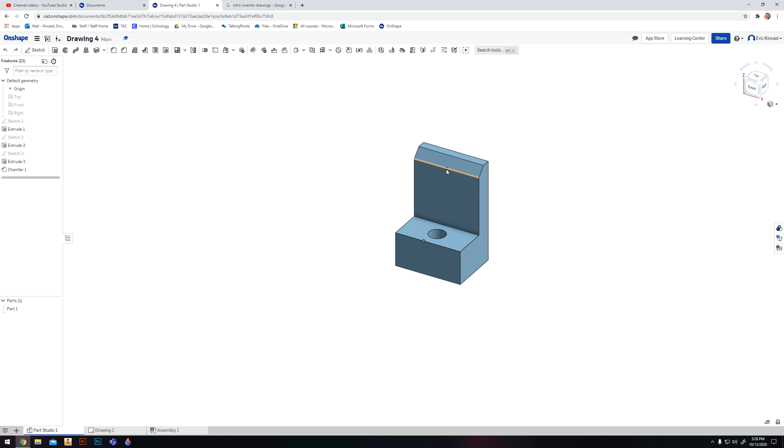All right, welcome to the fourth OnShape Drawing assignment. This one's going to be a little bit harder. We have a few features like a hole in a specific location. We've got some extra extrusions. We got a chamfer going across the top. Right, and you will be given a drawing that looks like this, and you'll have to reproduce that object.

Okay, so looking at number one, the first thing we want to do is determine how tall our object is and how wide it is. Right, so we could do that by looking at our front view. So our object is 3 inches by 2 inches. So let's start that first, right? So let's go to Documents, create a new document called Drawing 4, and hit OK.

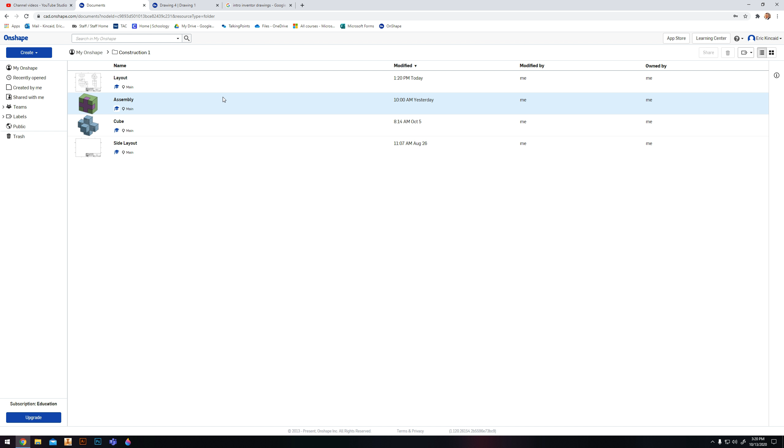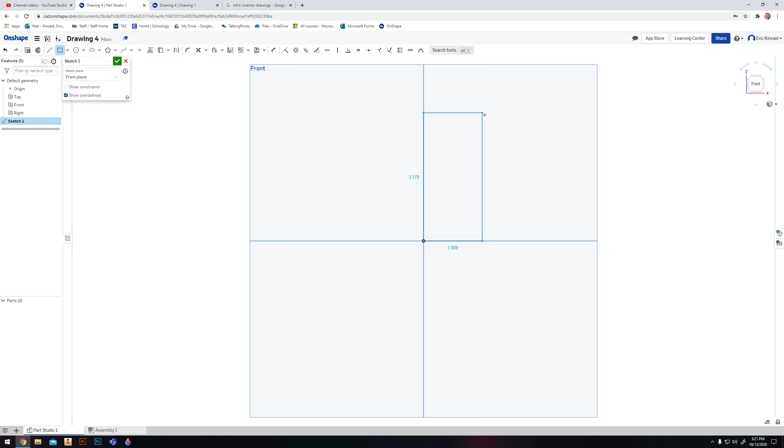From there, you're going to start a new sketch on the front plane, and we're simply going to draw a rectangle. Oh, I missed the origin point. Let's make sure we start on the origin. Draw a rectangle that is 2 inches wide by 3 inches tall.

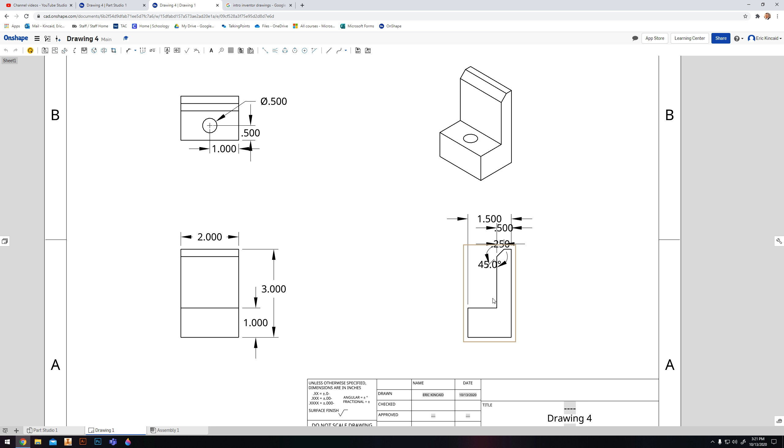All right, so we have our overall drawing size, but obviously we need to figure out a few things like how thick is it overall, and does it need to be extruded in overall width, right? So we're looking at our side for our depth profile, right? So overall it's 1.5, so we can either choose to extrude it the entire 1.5, or it looks like coming up from this line it is 0.5, half of an inch thick just on this part,

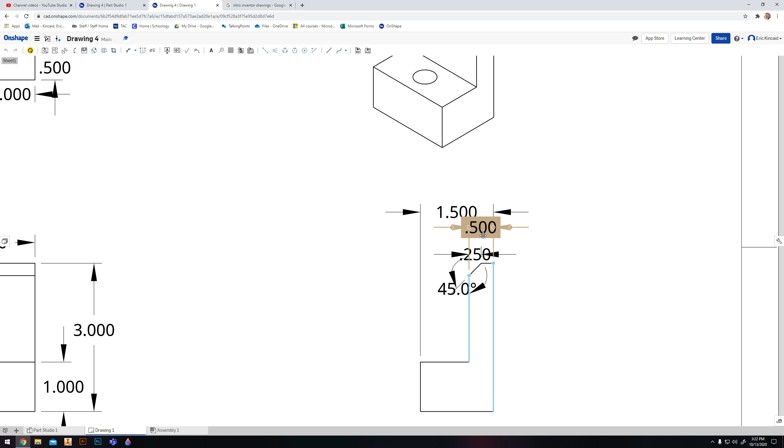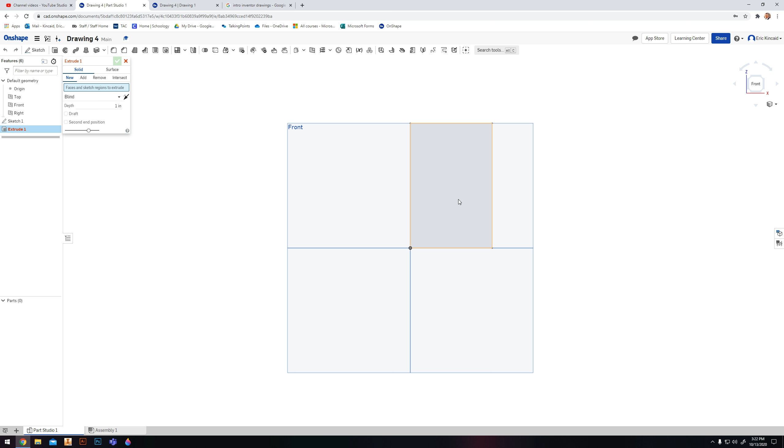right? So that means that this part down here, if we do a little math, if this is 0.5 and this is 1.5, we know that this is 1 inch, right? So I'm just going to extrude it 0.5, and then we'll just build a little rectangle off the front, and we'll extrude that 1 inch, right? So let's do that. I'm going to extrude this rectangle, change my depth to 0.5, and hit OK. Right, and then we got our back profile there.

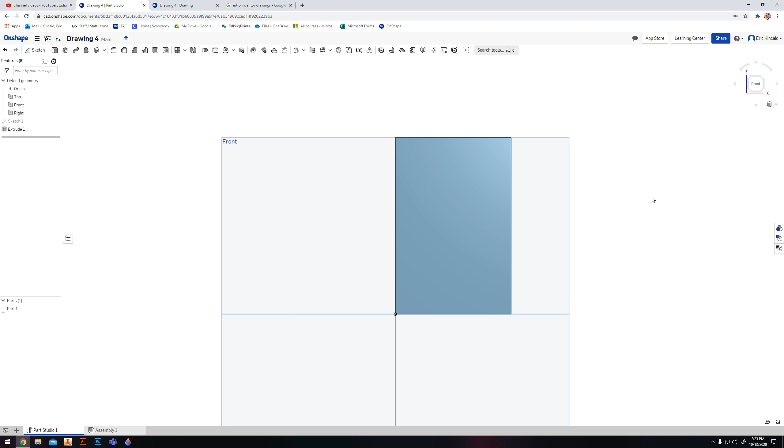So I said I wanted to build a small rectangle off of the front of it. How big does that rectangle have to be? So it looks like it is 1 inch, and it's all the way across, so we know that's 2 inches. So it's 1 inch tall by 2 inches. So I'm going to go back into OnShape here, go to Sketch, select my front face, rectangle tool, and I found that OnShape doesn't like if you tell it that it's 2 inches both times, right? So if I bring my rectangle out all the way to the other edge, it'll stop at 2.

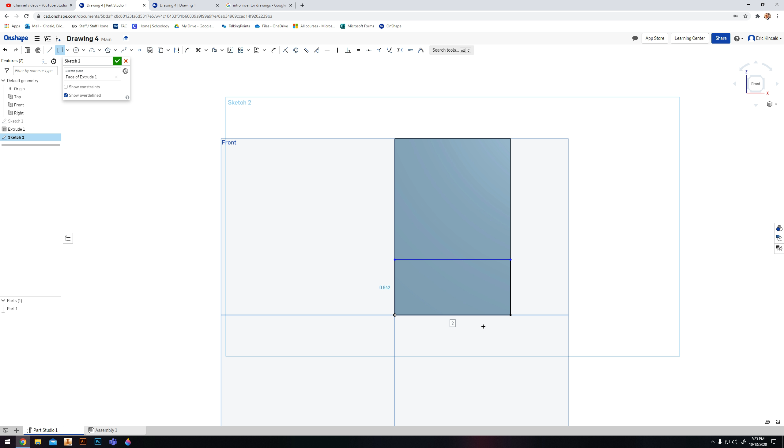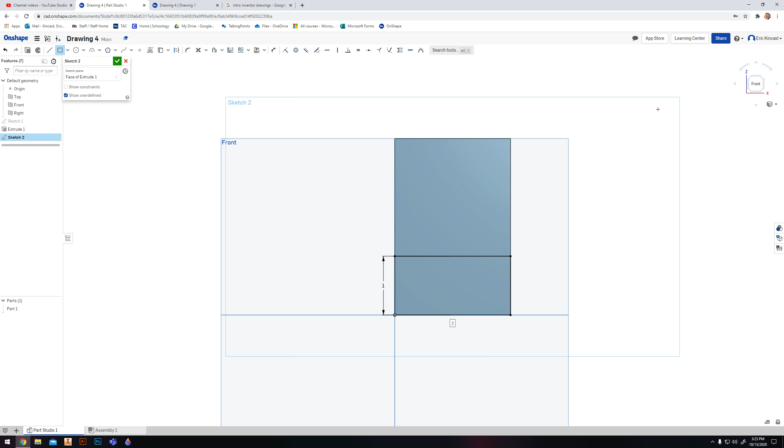And I'm going to bring this up. Now you can sit here all day and try to get it to 1, and I got it to 1 actually pretty easily. But ideally, what you want to do is click. If you hit enter on 2 here, it's going to error. But if you move your mouse over and don't click it, just highlight it and just type 1 and hit enter, it'll work. But if you change that number, it'll error that rectangle and turn red, because it's saying that from here to here is 2, and if you try to change that, it's trying to change this as well. Not a huge fan of that from Onshape, but it is what it is.

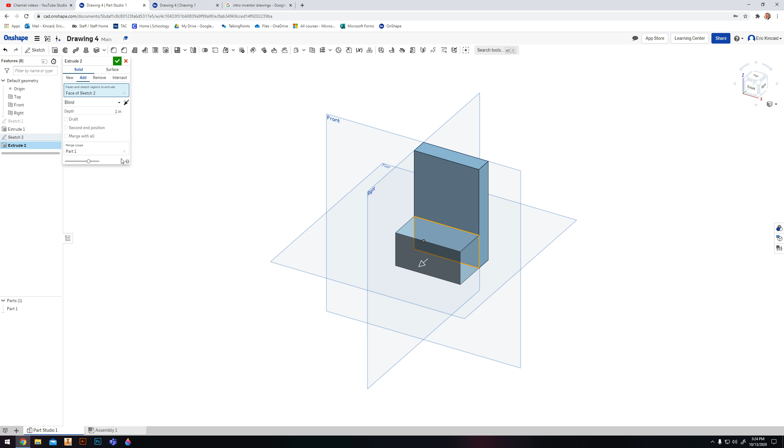So that's all I'm going to do on this sketch, because I need to extrude this out. And how far do I extrude it out? We did a little math there, right? 0.5, I need to bring it out to meet 1.5, so I'm going to bring it out 1 inch. Right, and it already did it for me because 1 inch is the default. So I'll hit OK.

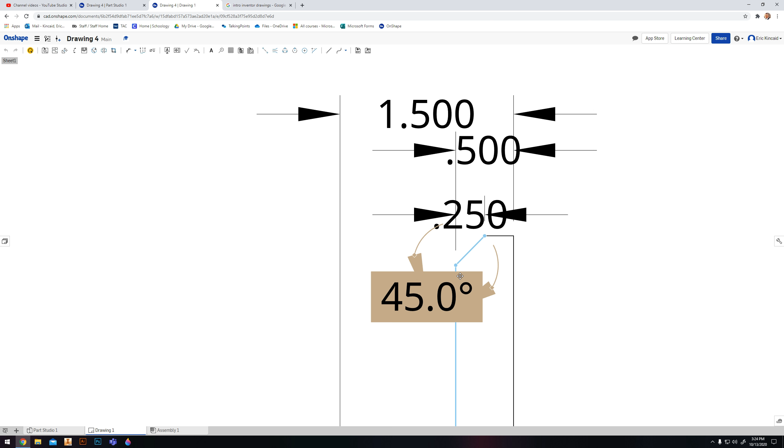So next we have a few options. We can start to figure out where our hole is, or we can add that chamfer up top, either or. Let's start with the chamfer. It's pretty easy. So some information about the chamfer. It's going up at an angle of 45 degrees, right? And the measurement is halfway across our overall depth. So it starts and then it's 0.25 inches long. So with those two, we can figure out how to create it very easily.

So I'm going to go back to my drawing. This one you don't even need to start a sketch. You can come up here to the chamfer tool. If you can't see the chamfer tool, you may need to zoom in or out. But I'm going to click the chamfer tool, and default is 0.2 inches.

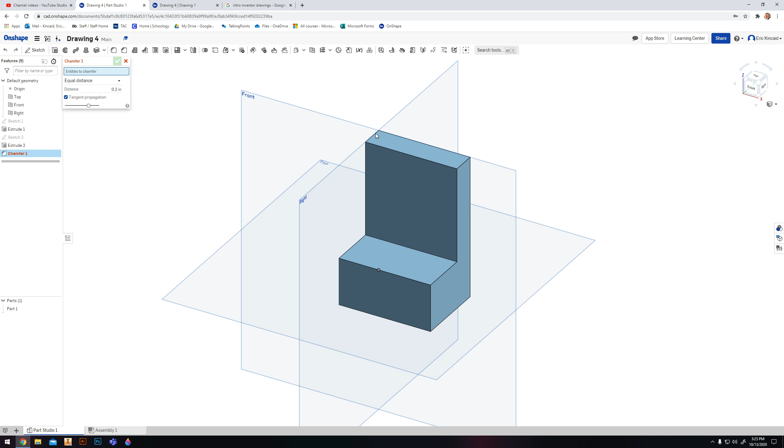But if I hover this edge that I want to chamfer, right, it'll glow that yellow-orange color. If I click it, it'll flatten it for me, right? And I need the distance to be 0.25 inches. And it automatically makes it 45 degrees for you.

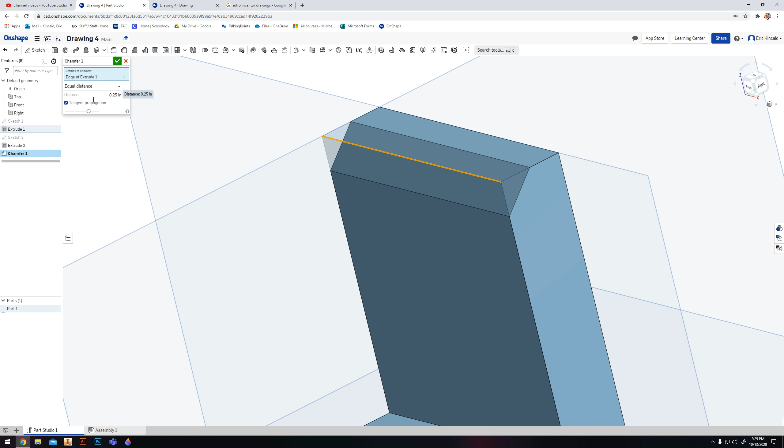Right, so I'm just going to chamfer this 0.25 and hit the check. Right, and that's actually it to add that chamfer. It's easier than it looks. And you could chamfer any edge you want. I mean, we don't need to, but technically you could do all of these. Right, you don't need to do that. Don't do that. But next thing we need to do is add that hole.

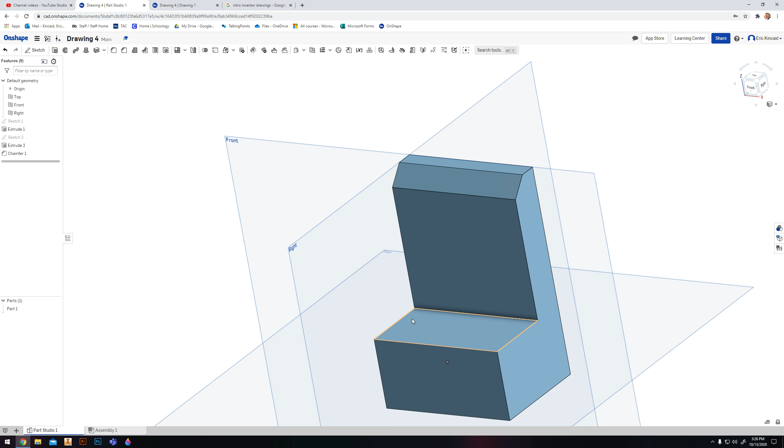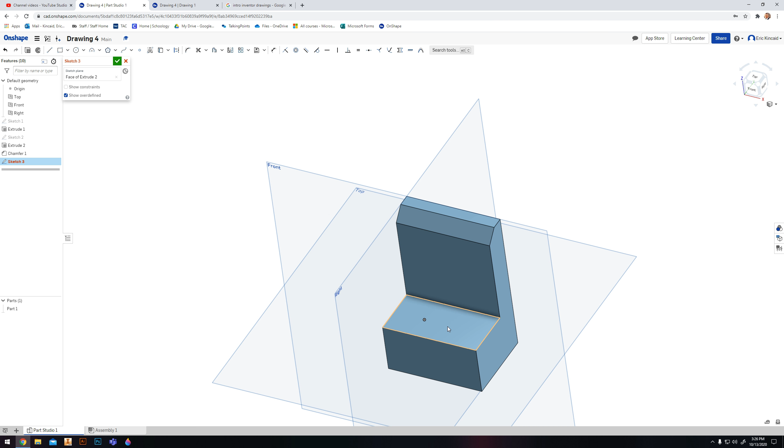So there's two different ways to make a hole. There is the hole feature, or there is just making a sketch and drawing your hole. Doesn't matter which one you use, but for this one I'm just going to draw a sketch because I'm pretty quick at it, right? So I'm going to select the face as the top of that little shelf area. Rotate so I'm looking at my top. And I'm going to select the center point circle tool, or C on your keyboard.

And I'm going to purposefully not put this in the center, but you want to try and get it near the center, so I'll just make it off center here. Right? And I'm going to draw a circle. But oh wait, we didn't look. How big is this circle? Let's go back.

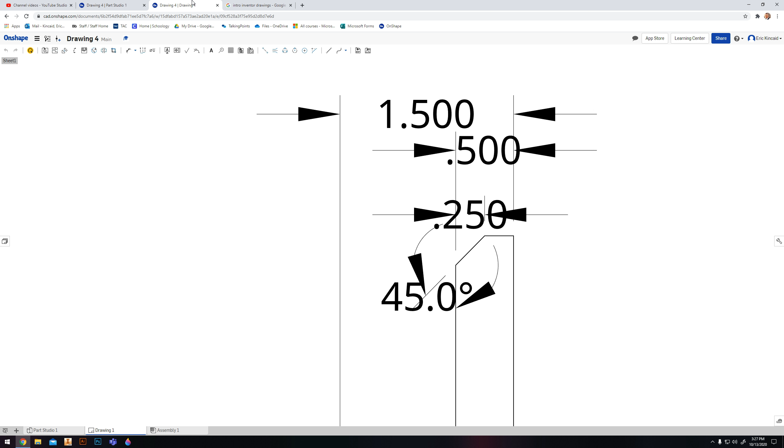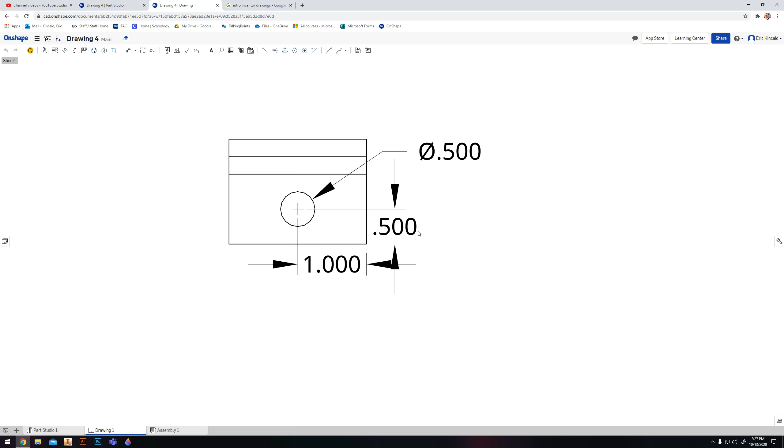So over here we have some important dimensions looking down from the top. We have this universal sign for diameter. Diameter of a circle is the measurement from one side to the other. So that means that the diameter of this circle is 0.5 inches. And then the other dimensions that we have here, 0.5 inches from the front and 1 inch from this side. Okay, so some important dimensions there.

All right, so again, I'm going to draw my circle. I'm going to drag it out, click, and I know that this circle needs to be 0.5 inches in diameter. And you'll see that it'll draw that sign again, right? That is diameter. So I look kind of centered. It's not too bad, but I need to make sure. So I'm going to hit D for dimension, or go to the dimension tool up here.

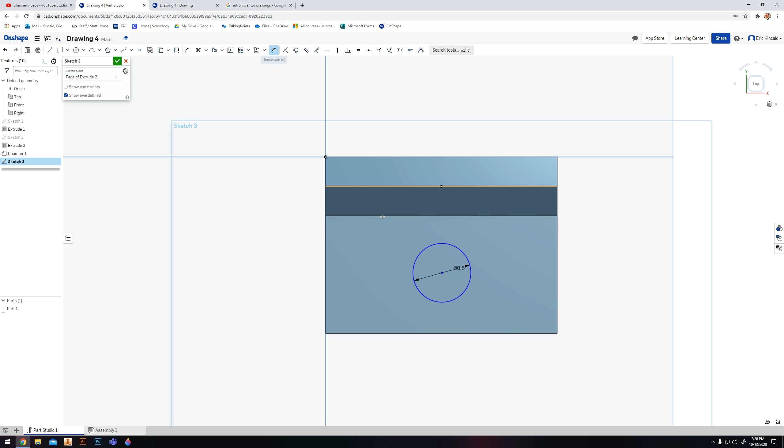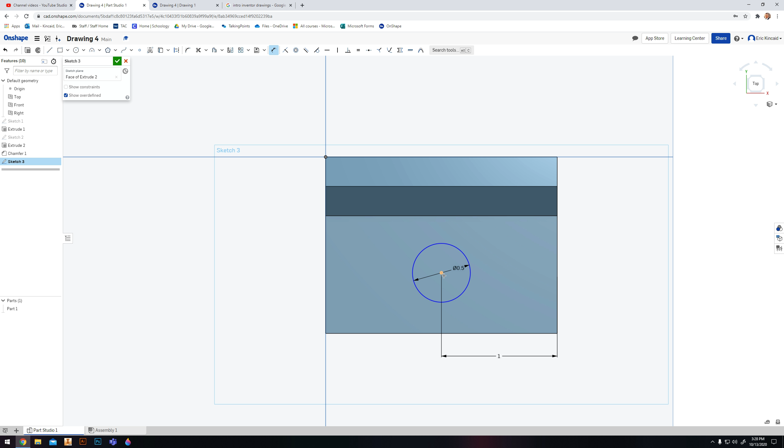And I'm going to click my center point. And over here, move it off my object. And I was very close, 0.996 in fact, whenever it should be 1, and that's the center of this object. Right? So now I need to move it 0.5 from the front of this. So I'm going to click the center point, click the bottom point, drag my dimension off of my object, drop it. I was very close there too, 0.51. It should be 0.5. Enter. And now that is centered on your drawing.

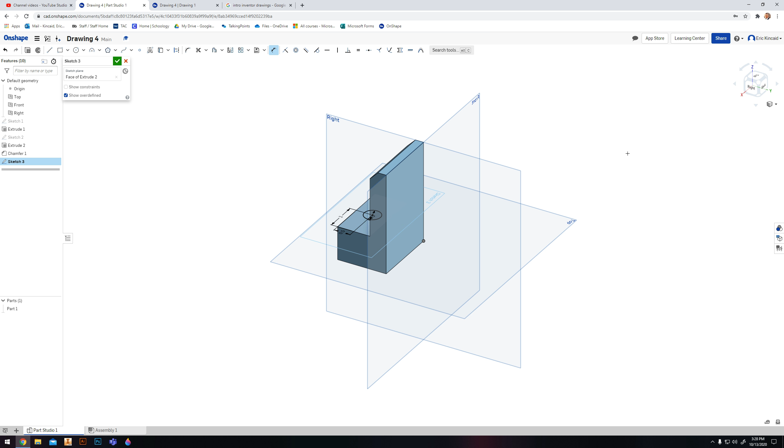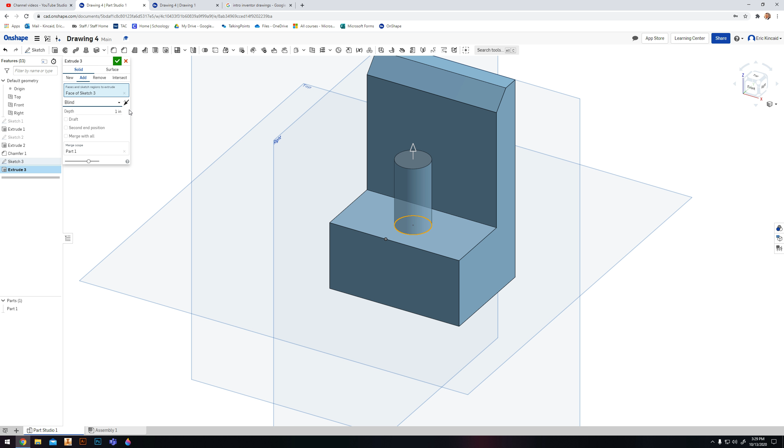Okay, so I'll hit the check mark. And I'm going to hit extrude and select that circle. And it wants to grow. Now just like in the drawing assignment number 2, we have to change some things in here. So we have new, add, remove, intersect. We're going to remove, right? And by default, it'll go an inch. This happens to be an inch, so it'll go all the way through, right?

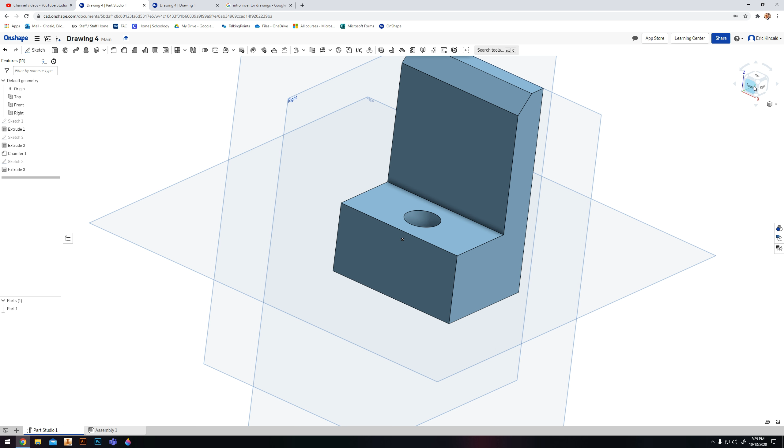So if you needed to make it longer, you would, but you shouldn't. 1 inch should go all the way through. You'll hit the check mark. Turn off your planes here. And you are finished. The last thing you're going to do, I actually found an easier way to make a drawing without having to create that V1 thing.

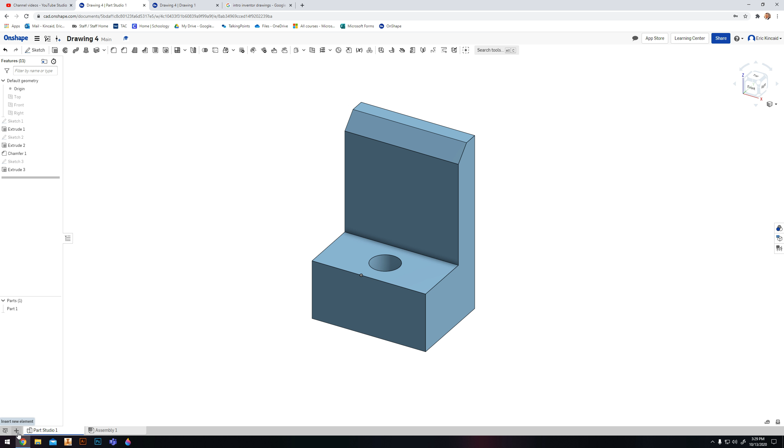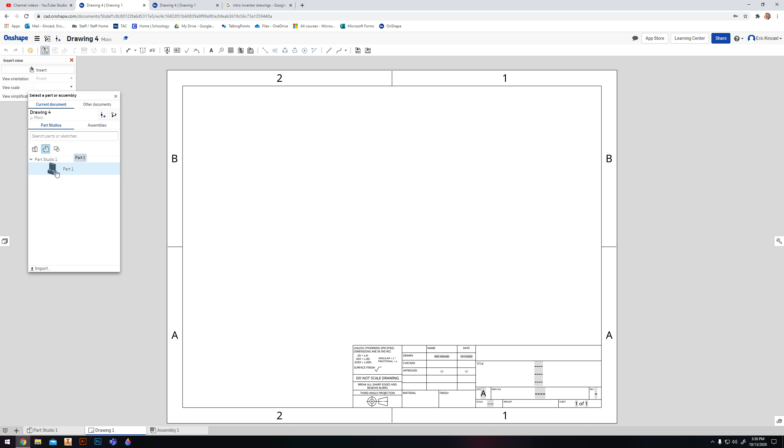So within your part file here, before you share it, what you're going to do is hit this plus insert new element down in the bottom left. Go to create drawing. You should have that recently opened ANSI A inch. Hit OK. And what it does is it pulls in your part instantly. So all you have to do is click it, and then it'll let you place it.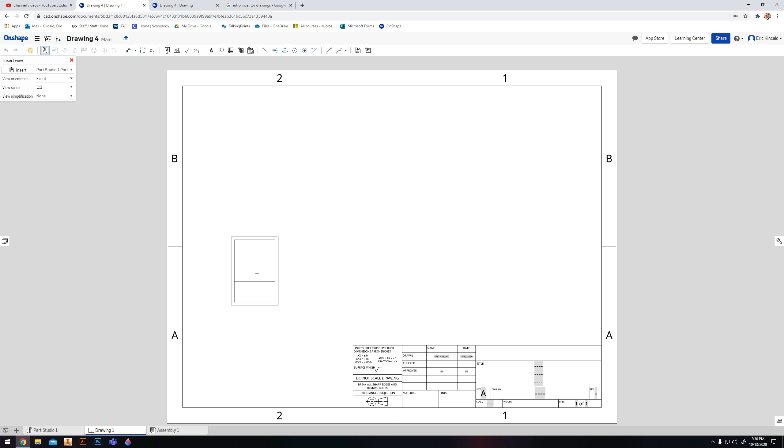So Onshape automatically detects if your object is too big to fit on this paper. So it automatically changes your view scale to 1 to 2. So what that means is every ½ inch on the paper is 1 inch in real life. So it's half the scale. Right? So that's why it looks so tiny whenever it should be bigger. If you change it to 1 to 1, it makes it the real size, but you can't fit all the views on there in the rectangle. So we do have to go half.

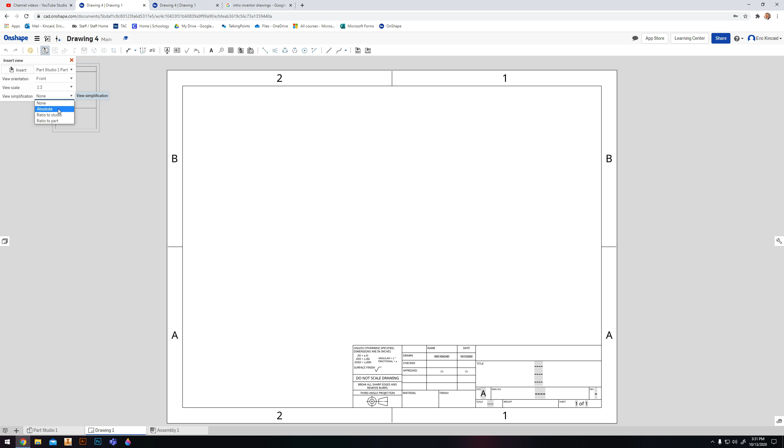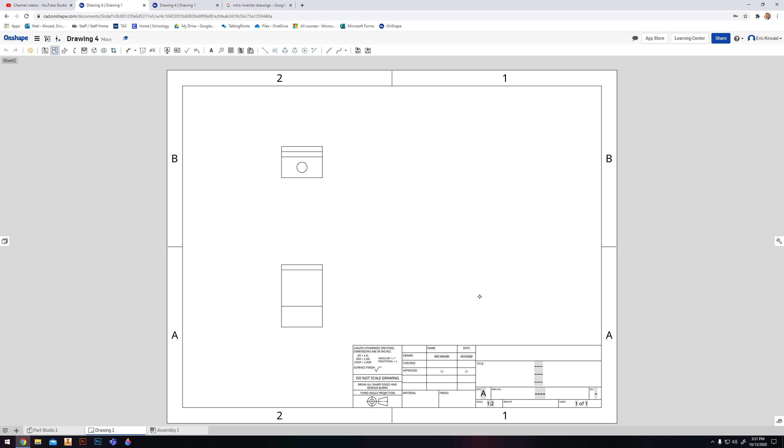Right? And then where it says view simplification, you can just put none. Yeah, leave it at none. So remember, you want to put this in the bottom left quadrant. The quadrants come from, pretend like this line is coming across, pretend like that line's coming across, right? So front view, bottom left, top view, top left, side view, you'll have to click that again to grab it, side view, bottom right, click it again, isometric view, top right.

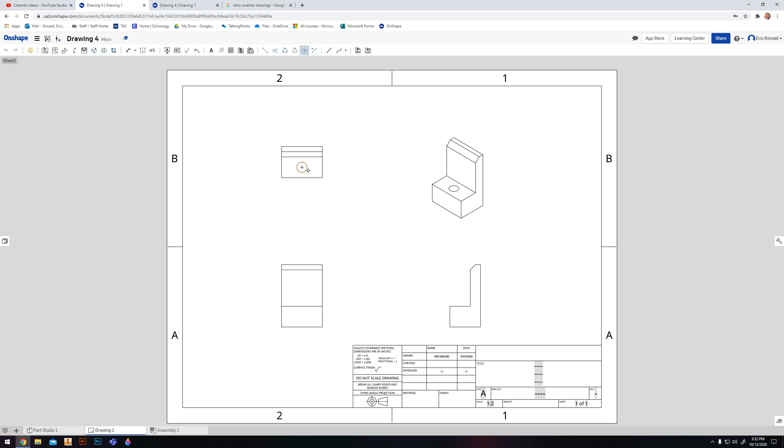All right, so then you'll start to add your dimensions, and you'll be able to use the dimension sheet to figure out which dimensions you need. The only thing that you need to add from here is a center point, and you do that by going here, center mark, and you're going to click right on your circle to create that center mark, and that's how you get to your actual dimension points for the location of that hole.

All right, when you're finished, you're going to share it, change the team, and select your class. Good luck.